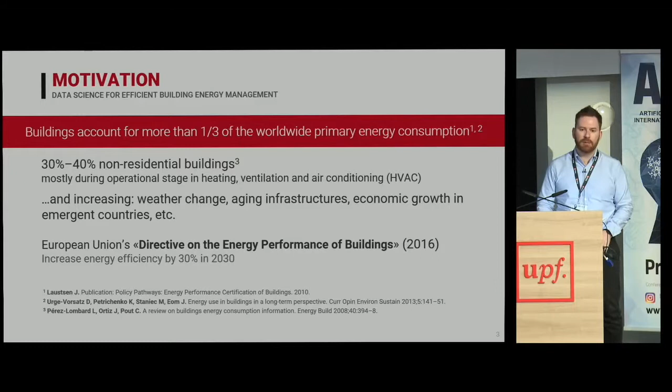In Europe, there is a directive on energy performance in buildings, which has an objective of an increase of energy efficiency by 30% in 2030. There are several strategies to achieve these energy savings in buildings. Renovation works, that is changing the building. Retrofitting, which is changing, updating, and improving the maintenance of the equipment, mostly the heating, ventilation, and air conditioning system, the HVAC systems, and also using clean energies

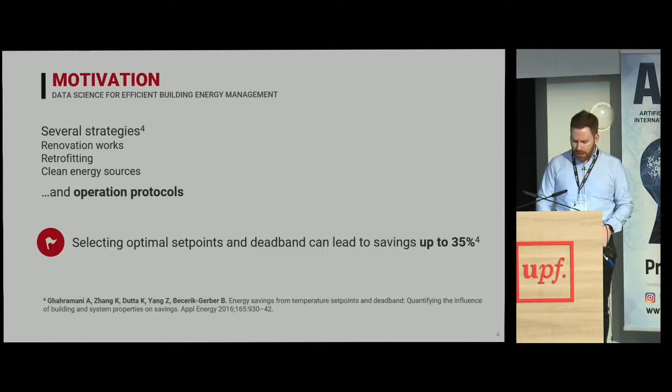is the good direction. And also, it has been shown that improving the operation protocols is very beneficial to improving energy efficiency. That is, selecting the optimal set points, selecting optimal control sequences for the equipment can lead to savings up to 35%. So, these days, this is possible, and this can also benefit from the improvement in the information systems and the IT which is used in building energy management systems.

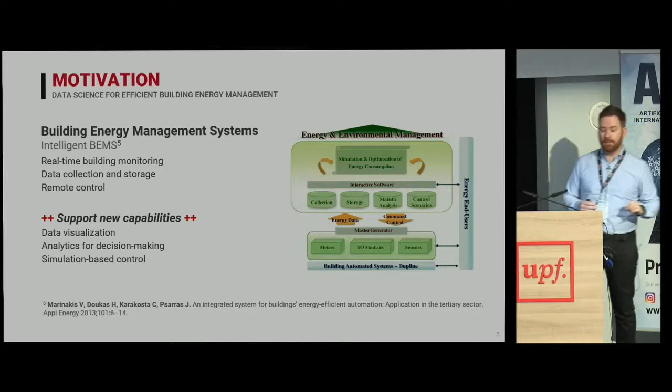Currently, we have more and more capabilities to collect data, to monitor buildings, and also to remotely control the buildings. So these technologies support new capabilities like data visualization, also advanced analytics for decision making, and also simulation-based control, in which I will focus my presentation afterwards.

And well, considering this context, we performed an in-depth review of the historical contributions of data science and machine learning in the area of building energy efficiency. We identified in this review different areas. I will focus on two of them: prediction of building energy load and building operation, because I will come back to them later in the presentation.

Regarding prediction of building energy loads, this mostly means the prediction of the amount of energy required at a certain time, and it is directly related to the energy consumption. When we predict energy load, we are predicting energy consumption. Here, weather and building use are the most important factors, and typically the most used techniques have been forecasting from historical data with statistical time series analysis, classification and pattern recognition for consumption categories, also anomaly detection, and of course the impact of the building occupants' behavior.

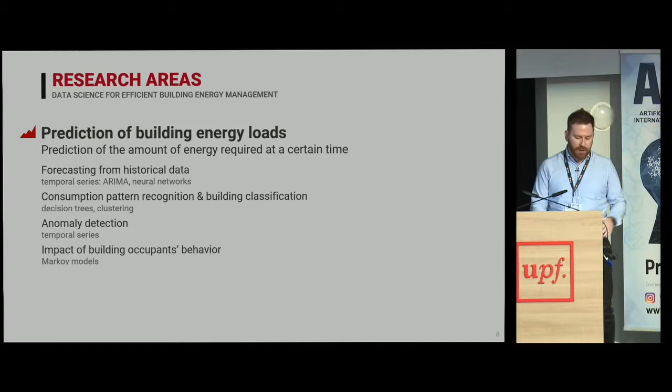Regarding building operation, here we focus on the configuration and operation of the equipment for optimal performance and comfort. Classical control systems have been prevalent in this area, but this more traditional control is mostly focused on real-time control, which is not the most appropriate for this equipment, particularly for HVAC, heating, ventilation, and air conditioning systems, because they have important inertial behavior, and they take a while to start and to get to

the optimal performance. So it is necessary to perform longer-term optimization, and therefore traditional control systems, including fuzzy control systems, have been used, but they are not very effective for longer time optimizations. Other techniques like operation rule extraction and also analysis of factors have been used.

From our review, we conclude that simple and interpretable techniques have been the most used ones, and indeed we did a more detailed analysis of the date of each paper contribution, and also the features that were available in the main data analysis tools, like R packages or also Python, KNIME, and this kind of environments.

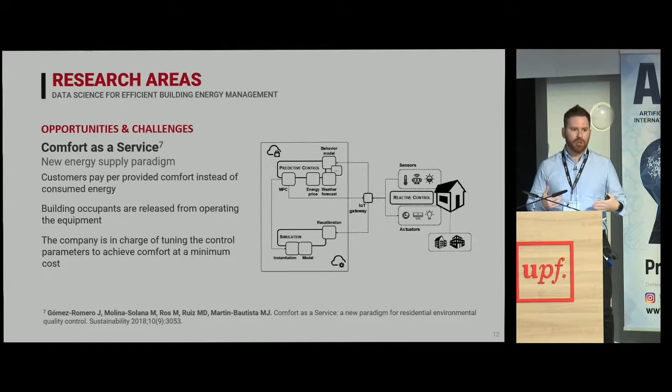Well, based on these new opportunities, we proposed in another paper a new paradigm for energy distribution and for energy provision to homes. It is called Comfort as a Service, in which we shift the responsibility for achieving energy efficiency from the users to the distribution and to the utility companies.

I don't want to go into details because I would like to show you some results that we obtained by using these more traditional techniques applied to energy efficiency. And afterwards, in the presentation, I will go with new approaches which can leverage the results that we have already obtained.

In order to avoid the problem that I mentioned before with real-time control in HVAC systems, in the last 10, 15 years, model predictive control has been used in this regard. In model predictive control, we have a simulation model of the building, and we use this simulation model to derive optimal control. Depending on the kind of simulation model that we have available, we can apply some techniques or others.

In general, if we have this simulation model, we can solve the control problem as a combinatorial optimization problem. If our simulation model is not very complex, we can solve this by linear programming models, which provide quite good results for small buildings with few interactions between the different components and sections of the building. We can also use a full complexity model that is usually a physical model of the building, which can be built with the usual tools like EnergyPlus or other similar software. Also in MATLAB, you can build this kind of models.

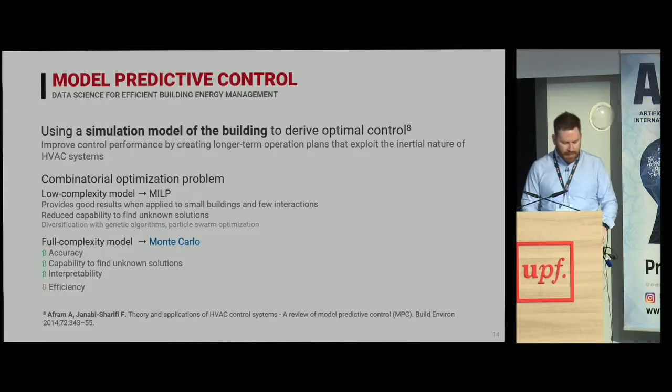And we explored the use of full complexity models for building control in this project called Energy in Time. It was funded by the 7th Framework Programme here in the European Union. And in this project, we partnered with different companies and other research groups, including building operators, simulation developers, energy experts, and also us as computer scientists, to develop a control system for HVAC control in non-residential buildings.

Essentially, we used a full complexity model, simulating multiple alternative scenarios to select the best one for operating the building, usually in a medium period, like next day or next couple of days. The system integrated the prediction of the expected building conditions, the generation of the control, and also the application of these control instructions. So we cover from deciding the best control strategy to applying this control strategy to the building, which allowed us to test the results of our developments in a simulation environment, but also in a real building.

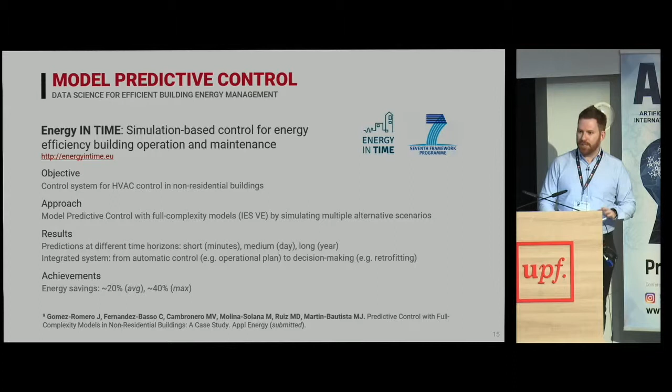Just to mention a couple of important things, we developed the generation of the control sequence for the building as a Markov process. Essentially, we built a graph of the possible set point changes, the changes in the control instruction for each one of the pieces of equipment, as a random graph, and then we perform a random walk on this graph. There was some heuristic information in the generation of this graph, just to adapt to the specific conditions of each building.

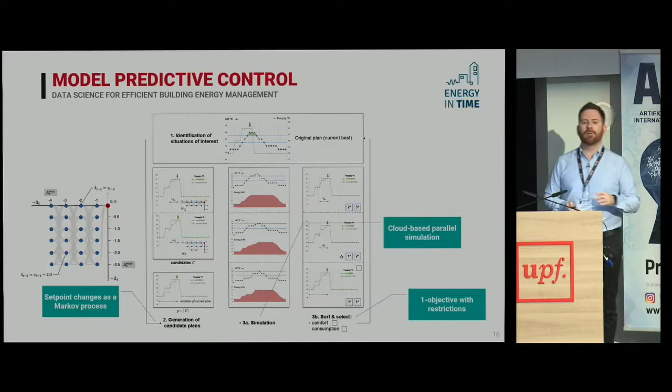So here in this part, we put quite a lot of heuristic knowledge about the behavior of the building, which, as you may guess, is one of the main difficulties and also limitations for this approach. Then we applied simulation. We simulated the different control strategies, the different plans in terms of the project. For this, we use a cloud-based parallel simulation provided by IES software, an Irish company developing simulation models and simulation software.

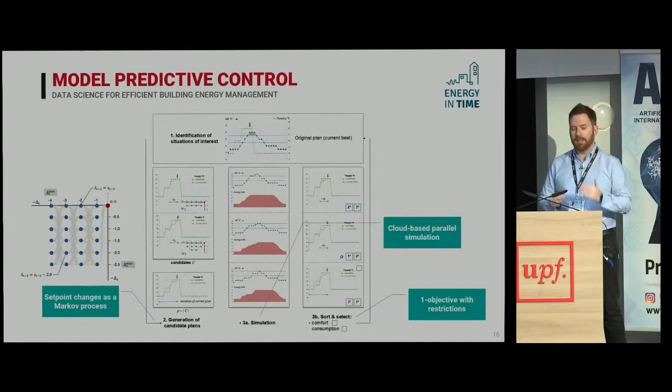And finally, we modeled the selection problem as a one objective problem with restrictions. The objective is minimizing the consumed energy, and the restrictions are these temperature comfort intervals that are predefined for each building. And we got some interesting results. In particular, we have 4 demo buildings in this project. One of them was the Sanomatalo building, called Sanoma House, the House of Press. It's an office building in Helsinki, with, as you may guess, quite extreme weather, particularly in winter.

So in simulation, we got some interesting results, and we realized that we could get savings between 13% and 36% in the softer periods of winter. Harsh winter was more difficult to address, mostly because the HVAC system is adapted or optimized for the winter period, so it's working full power during the harsh days of winter. These results were obtained in the simulation environment. They were quite interesting. Then we proceeded to the real building, and we realized 2 things.

The first one is that the approach actually works in the real building, but also that most savings are not achieved by optimizing the control strategies usually applied by the building operators, but by simply putting a more or less efficient control system on the building. In this chart, you can see that we have some valleys here. These 2 charts are testing of the system in the real building. We performed about 1 month of automatic control on the real building, and this is the consumption of our control system, and this is the baseline, the consumption without the control system.

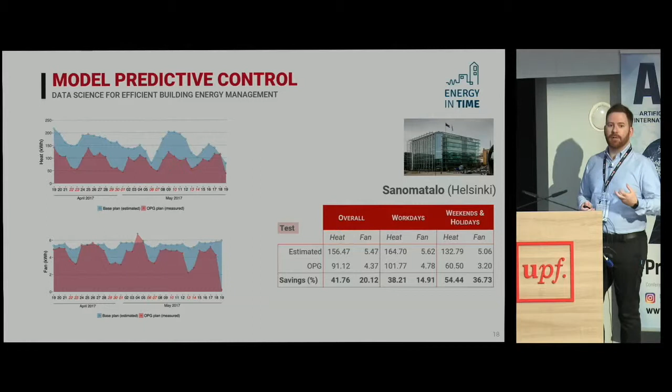As you can see, work days go quite well. The actual functioning of the building is close to the simulation model, but usually it performs worse than in the simulation model. For weekends and holidays, the savings are huge, mostly because it's not possible for the operators to fine-tune the strategies at this point. And just to mention that we performed some calculations for the whole year, and we realized that with this control system, using a full simulation model with heuristic knowledge, we can save quite a lot of energy and also contaminant emissions in a whole year.

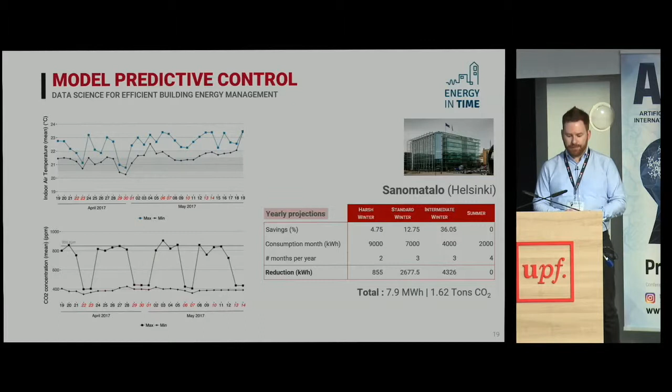These kinds of approaches, and the one that we developed in particular, have some limitations. The first one is that creating and running a simulation model is very time consuming. If we want to develop a full complexity physical model of the system, this is quite difficult and takes very long to achieve. And also, as I have mentioned, heuristic knowledge is required to model, in particular, the distribution function of the Markov process.

So this approach is not very scalable, and for this reason, after the end of the project, we started exploring new approaches in which we want to exploit the capabilities of new machine learning technologies to learn the simulation model, and also apply machine learning to learn or implement the decision process based on simulations, or more efficient simulation, and also on historical data. And for this, now we are focused on using deep learning for building energy management.

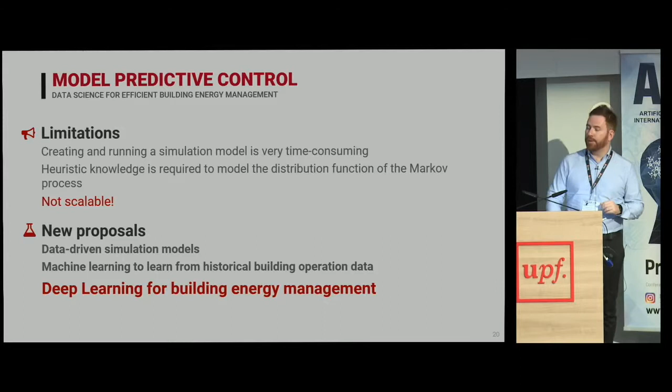Deep learning can be used mostly in two different ways, which are very closely related to the two areas that I mentioned at the beginning of the presentation, which are simulation and also building control. In the literature, as I mentioned before, we can find some approaches using a neural network to predict energy consumption or to predict energy demand.

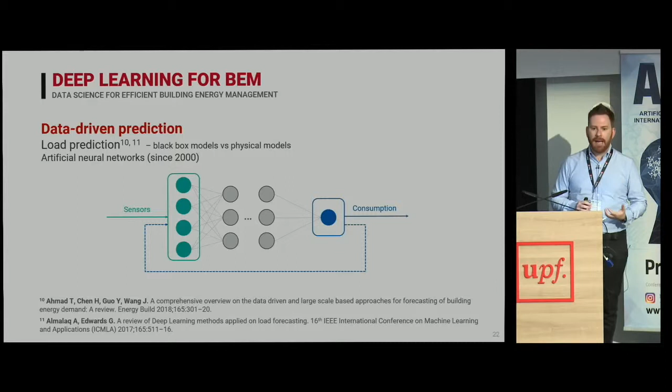But in general, data-driven simulation requires not only predicting consumption values, but also predicting the state or the next state of sensors inside the building. For example, if we are monitoring temperatures, at the input we need temperatures and also actuation, control. At the output, we need to predict consumption, but also the next state of these temperature sensors, and maybe new ones which have not been considered at the input.

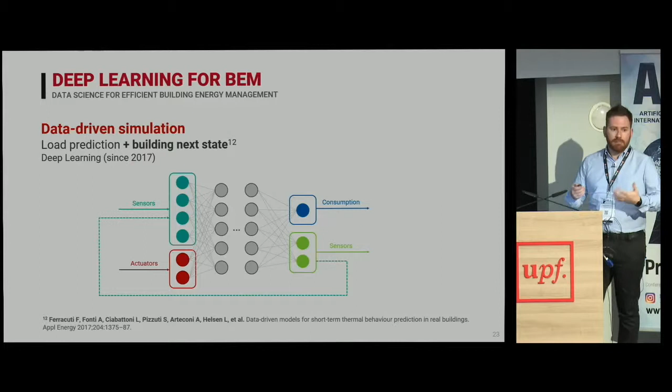Well, this kind of network architecture is typically a recursive network, which can be modeled in deep learning terms as a recurrent network or also as a sequence-to-sequence network. In this case, we have several sequences, series at the input, and we have series or single values at the output. On the left, you can see a very recent paper for data-driven simulation using deep learning, and these authors are using a recurrent network to get consumption and sensor estimations from the building situation.

This approach can be leveraged to insert into the output sequence not only the predicted consumption and temperature values, but also actuation. In some way, if we have enough historical data considering good actuation, we can learn not only the next situation of the building, but also the best control strategies leading to this situation.

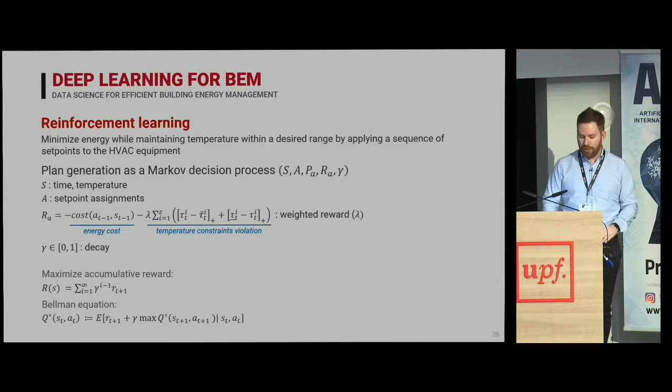I won't go into details. If you want more information, there are a couple of papers explaining this in more detail. If we focus on deep learning, I will go directly to this second approach. We can implement the previous optimization problem as the estimation of the Q values by using a deep neural network with historical or with simulated data. There are some approaches in this regard, but still they are limited to very specific equipment and not to complete buildings in general.

And to wrap up the presentation and point out the most interesting points in this explanation, I would like to recall that deep learning for building energy management can be used to address two limitations that we identified before and that we actually suffered in our project. The first one is the creation and the execution of the simulation model. If we are able to build a data-driven model by using historical data, then we don't need a physical simulation model, and then simulation can run quickly and also without human supervision.